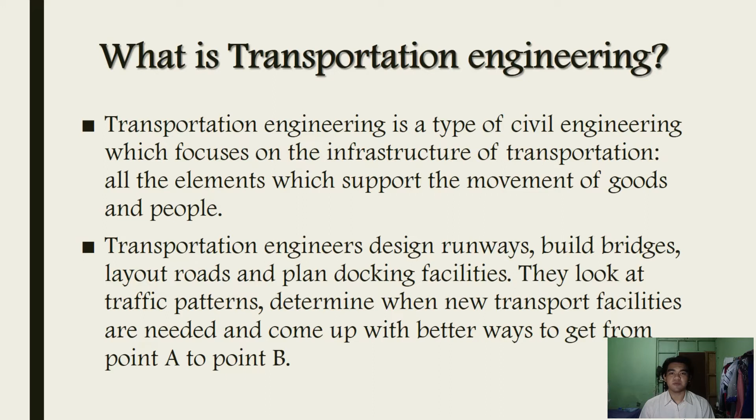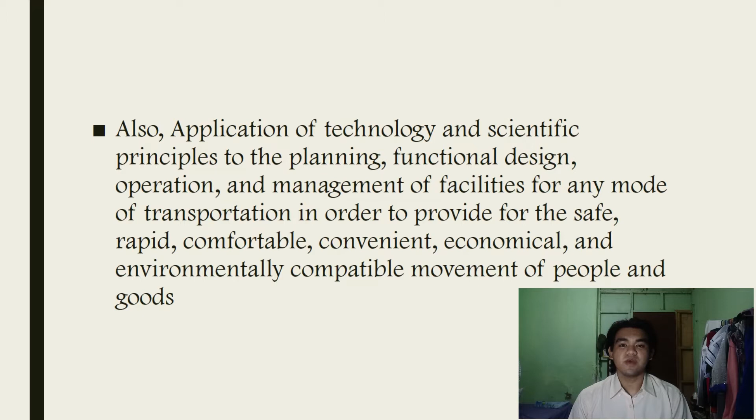Also, it is the application of technology and scientific principles to the planning, functional design, operation, and management of facilities for any mode of transportation in order to provide for the safe, rapid, comfortable, convenient, economical, and environmentally compatible movement of people and goods. There are different types of infrastructures that transportation engineers build.

First are bridges. Some examples of bridges are the Golden Gate Bridge from San Francisco, California, and the Sydney Harbour Bridge from Sydney, Australia. Next are airports. One example of airports is the Beijing International Airport from Langfang, China. Next are roads. Next are railways and stations. One example is the Settle Carlisle Railway from Settle, England.

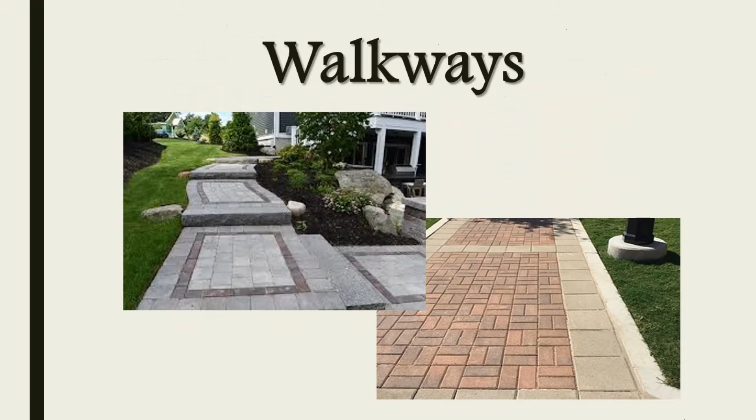Next are walkways. Next we have tunnels. One example is the Eisenhower Tunnel from Colorado. Next we have ports and waterways. One example is the port of Shanghai from China.

I'm James Paul H. Lazona from BSCE 1A, and I'm going to discuss the characteristics of transportation system. There are five characteristics of transportation system that make it diverse and complex: multimodal, multi-sector, multi-problem, multi-objective, and multidisciplinary. Multimodal, covering all modes of transport, air, land, and sea, for both passengers and freight.

Multi-sector, encompassing the problem and viewpoint of government, private industry, and public. Multi-problem, ranging across a spectrum of issues that includes national and international policy, planning of regional system, the location and design of specific facilities, carrier management issues, regulatory, institutional, and financial policies.

Multi-objective, aiming at national and regional economic development, urban development, environmental quality, and social quality, as well as service to users and financial and economic feasibility. Multidisciplinary, drawing on the theories and methods of engineering, economics, operations research, political science, psychology, other natural and social sciences, management, and law.

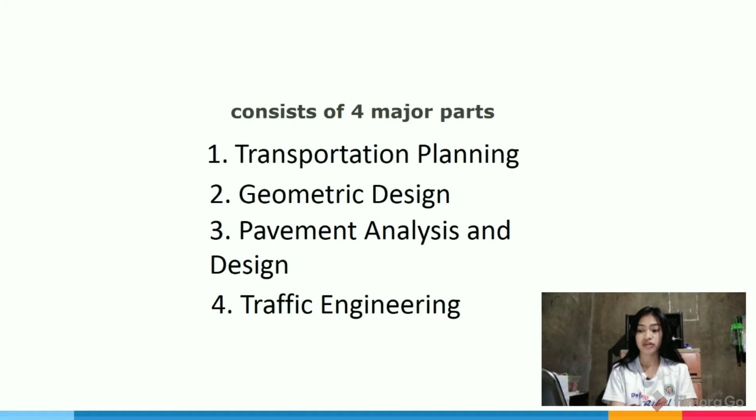Transportation planning. It involves the development of transport model, accurately representing both the current and future transport system. It relates also to the elements of urban planning and involves forecasting decisions and political factors. It improves efficiency, quality, and promotes equity. Transportation planning is the process of defining future goals, investments and designs, and preparing for the future needs to move people and goods to destination.

Number 2, geometric design. It deals with the physical proportioning of transportation facilities, deals with the dimensions of the road and layout of feasible highway. It is majorly concerned with the design of the road elements and does not include pavement design, structural, and drainage component. It is designed to provide efficiency in traffic with maximum safety at a reasonable cost.

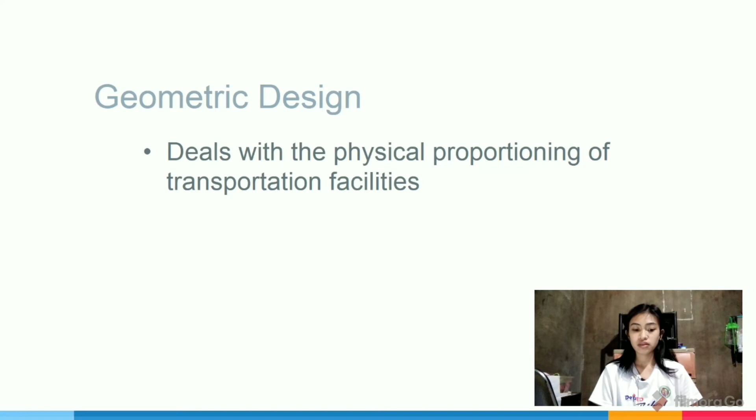It includes horizontal alignment, vertical alignment, and cross-section. Horizontal alignment and vertical alignment talk about the route of the road, defined as a series of horizontal tangents and curves, while cross-section shows positions of vehicles, bicycle lanes, and sidewalks.

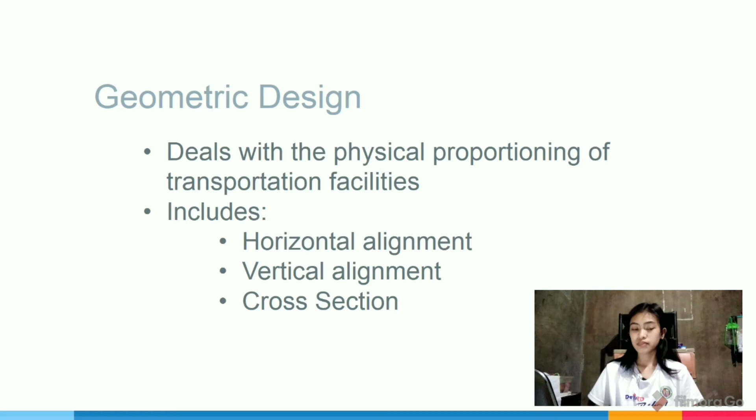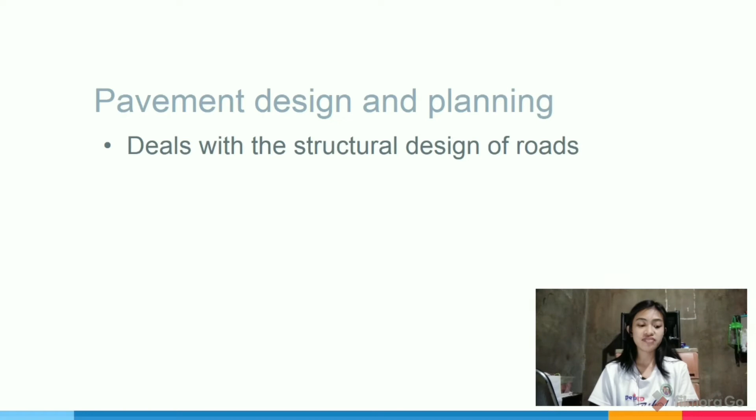Number 3, pavement design and planning. Pavement design and planning deals with the structural design of roads, both bituminous and concrete, commonly known as flexible and rigid pavements. It deals with the design of paving materials, determination of layer thickness, and construction and maintenance procedure. Thus, design mainly covers structural design, functional aspects, and drainage design.

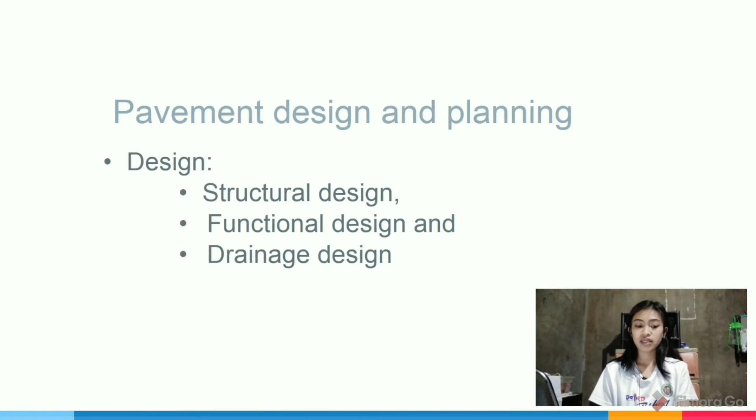Structural design ensures that the pavement has enough strength to withstand the impact of loads. Functional design emphasizes the riding quality, and the drainage design protects the pavement from damage due to water infiltration.

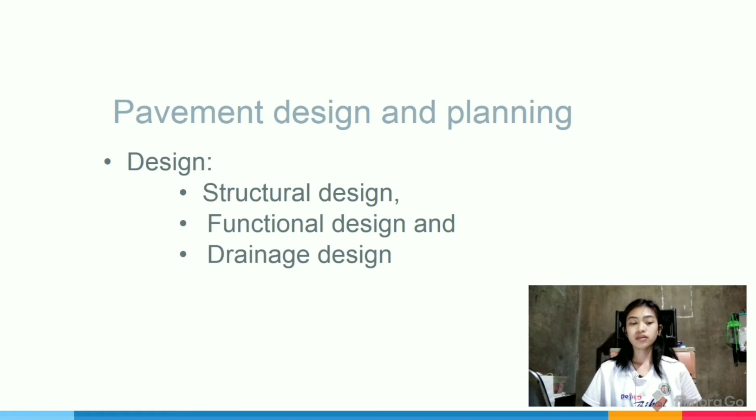Number 4. Traffic engineering. It covers a broad range of engineering application with a focus on the safety of the public, efficient use of transportation resources, and mobility of people and goods. It involves a variety of engineering and management skills including design, operation, and system optimization.

In order to address the said requirement, the traffic engineer must first understand the traffic flow behavior and characteristics by extensive collection of traffic flow data. Traffic flow is controlled so that transport infrastructure is used optimally as well as with good service quality.

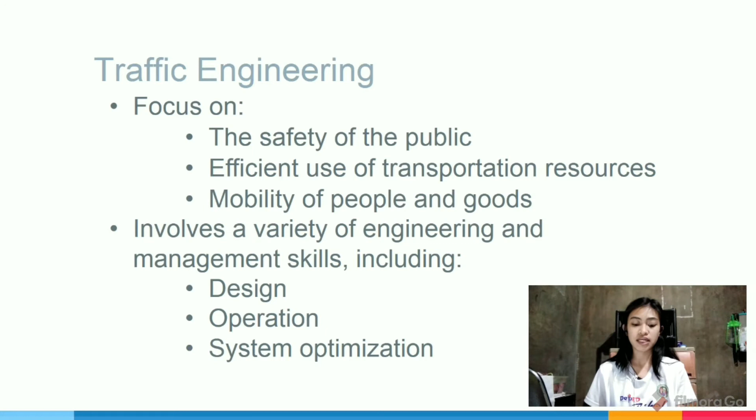In short, the role of a traffic engineer is to protect the environment while providing mobility, preserve scarce resources while assuring economic activity, and assure safety and security to people and vehicles through both acceptable practices and high-tech communications.

Other important disciplines. So, in addition to the four major disciplines of transportation, there are several other important disciplines that have evolved in the past few decades. Although it is difficult to categorize them into separate well-defined disciplines because of the significant overlap, it may be worth the effort to highlight the importance given by the transportation community. They can be enumerated as below.

Number 1. Public transportation. Public transportation or mass transportation deals with the study of the transportation system that meets the travel need of several people by sharing a vehicle. Generally, this focuses on the urban travel by bus and rail transit. The major topics include characteristics of various modes, planning, management and operations, and policies for promoting public transportation.

Number 2. Financial and economic analysis. Transportation facilities require large capital investments. Therefore, it is imperative that whoever invests money should get the returns. When government invests in transportation, its objective is often not monetary returns, but social benefits.